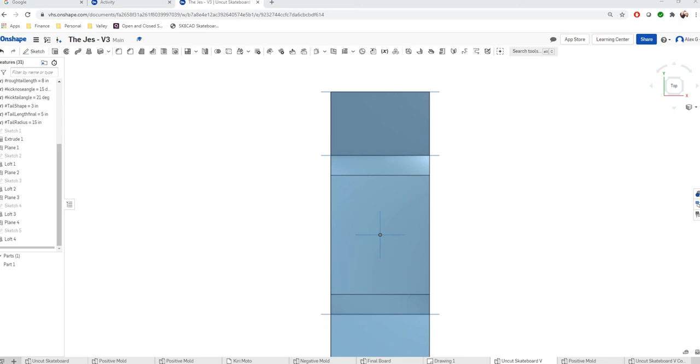Okay, we're back and we're going to do the first part of our final cut on the skateboard and our model here. And what we're going to do is we're going to create a work plane, and then we're going to use that work plane in a separate part to actually create the final sketch or the final cut of the skateboard, because we want to leave this model untouched.

We want to be able to use this when we actually use our assembly file and put our molds and skateboard together. So to do that, we've got to do a couple of steps here, and I'm going to walk you guys through how to do that in this video, while also keeping the idea that we want to keep a skateboard that's really parametric, able to change all of our models and cuts based on what the customer needs.

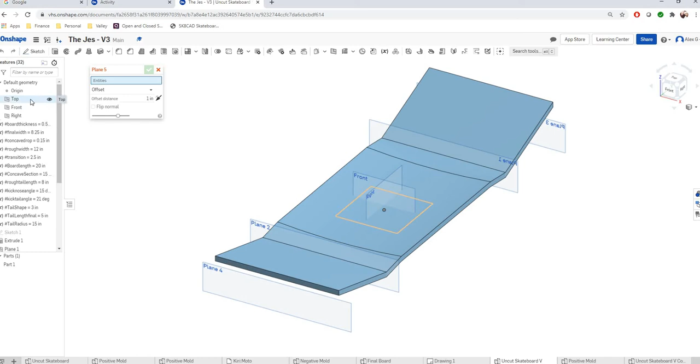Okay, so we're going to start off here with a work plane, and that work plane offset is going to go from the top of our geometry. Okay, so the top of our origin, and we're going to put it like 1 inch above our skateboard. The reason we're doing that, getting this distance from here to here, is so that as the angle of these kicks change, they won't interfere with the sketch that we're going to create up here.

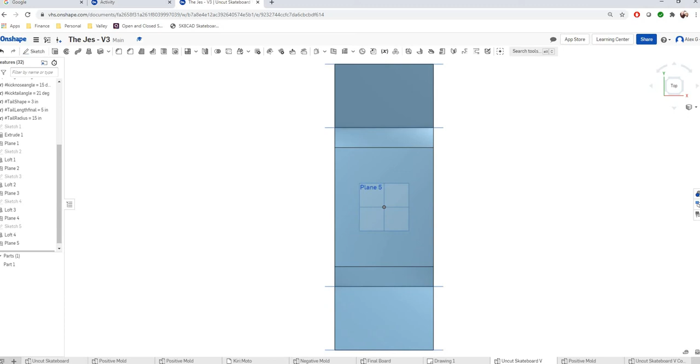And then we're going to start a sketch on that work plane, and we're going to just start off with a simple rectangle. You see how it wants to attach there? I don't want it to be attached. I don't want to be constrained by anything, so I'm just going to make sure nothing is yellow, and I'm going to put my rectangle in there.

All right, and then when we start putting constraints in, it will be the exact constraints that we want. We know we're not locked into anything that is going to surprise us later on.

Okay, so now we want it to be constrained to the middle of our board. And the only way to make sure that everybody is on the same page of this, if you didn't constrain your board to the origin, is by turning on the visibility of that center sketch. And we're going to copy that geometry. So we hit the visibility for our first sketch, and then use geometry, and we're going to click on that line there, make sure it's going all the way across.

And now we can put our dimension going down. Mine does happen to be with the origin, but if yours didn't, then if you just clicked on the origin, it wouldn't be in the right spot. And we're going to put 0. Okay, so now it's constrained to that 0, and we want this to be the correct distance going all the way out.

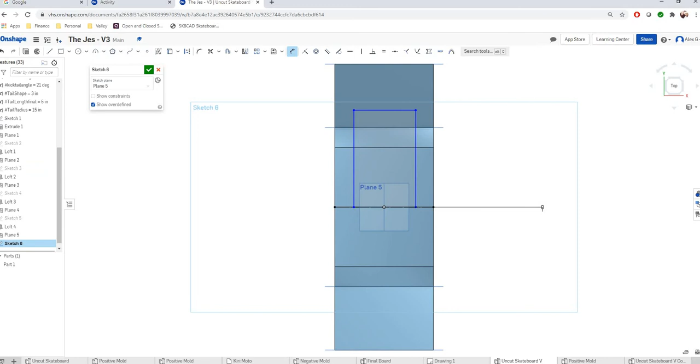So what we'll do is we're going to put in a measurement here, and we're going to put in a little evaluation. My mind just totally blanked on the correct terminology. But we're going to put in a little equation here, and that's going to give us the correct distance.

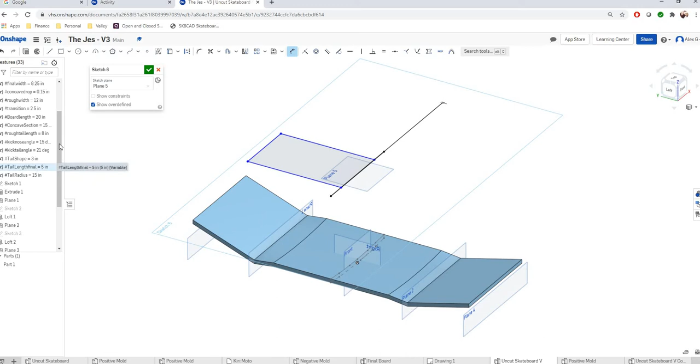But first, before we do that, we've got to make sure that we're working with the right end of the board. Okay, so let's figure out which end of the board we're working on. We're going to do that by changing the kick nose angle of one of them. We're going to make it perfectly flat, so we're going to say the angle is 0. Okay, let's see if it'll let us do that.

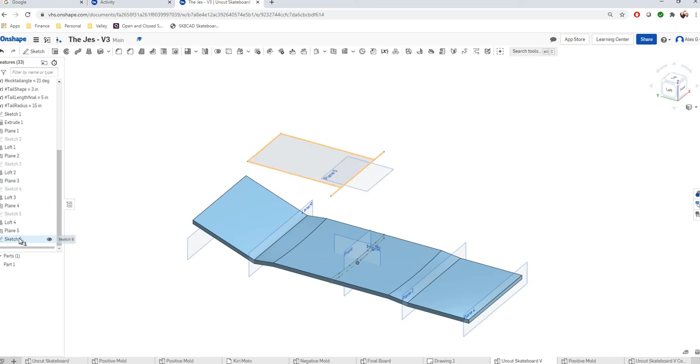Yep, okay, so this is the kick nose. See how it's 0 up here? So this is the nose. So we are working with the tail. So we need to make sure that when we're putting our dimension in this guy, that we reference the tail length.

The other thing we need to do is add in another variable called tail length final, and we're going to default that to 5 inches. You can change it later, 6 inches, whatever you want, but we're going to change that default to 5 inches, and make sure you add the variable above being 5 inches.

You've already added a ton of variables, so I don't want to spend time going over that, but you're going to put in tail length final, and then make sure you drag it up above here so that the sketch can actually use it.

The formula that we're going to use, I've recreated in a Word document so we can just copy and paste it. You can see on the screen here this is the formula we're going to be using. Onshape's syntax is pretty finicky, so I was playing around with it beforehand to make sure we had the right one.

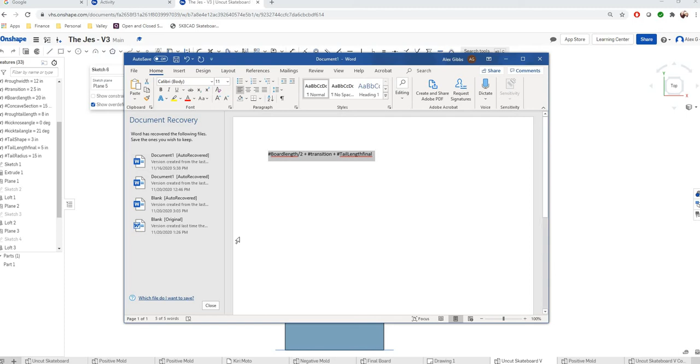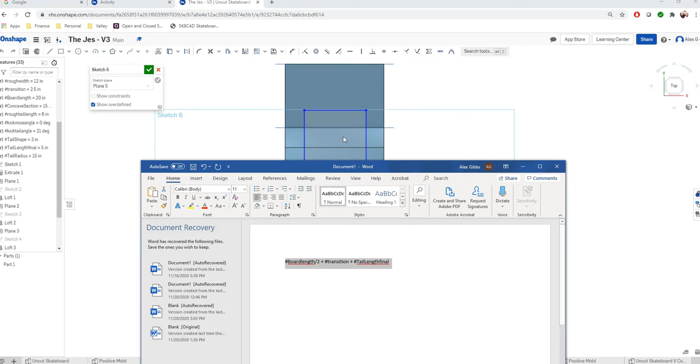The length we want is driven by the measurements we already have. We have the board length, which goes all the way across the board, so you have to divide that by 2. We have the transition that goes from here to here, and then the final tail length, which is what we're going to be putting in as a measurement itself, which we have set for 5 inches.

So we're going to put that dimension in, and we're just going to copy and paste that formula we created, this formula right here. You do the same thing for the other end, only you're just going to be using the nose length for the other end, and you'll have to create those variables. I'm not going to do both sides for you, you guys have to do both sides.

Now we put that in there, and it's going to reference all of our other things. So as we change this, let's say I change the tail length to 6 inches—okay, you can see it went a little too long there, so we'd have to change some other measurements. So I'm going to change it back to 5 inches.

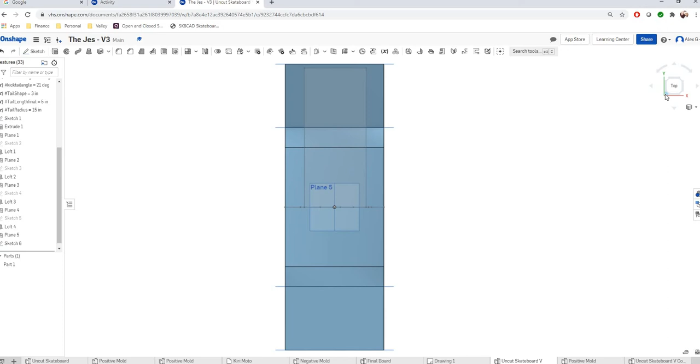Now we've got half of our board ready to go. All right, the next measurements we're going to use are ones we've already created.

This is the final width of the board. We already created this in a previous video, the final width, so that when we change this number, it's going to automatically adjust all the geometry we've already built into the board. So we can just reference that number going across here to here by saying hashtag final width. Now we've got that number called.

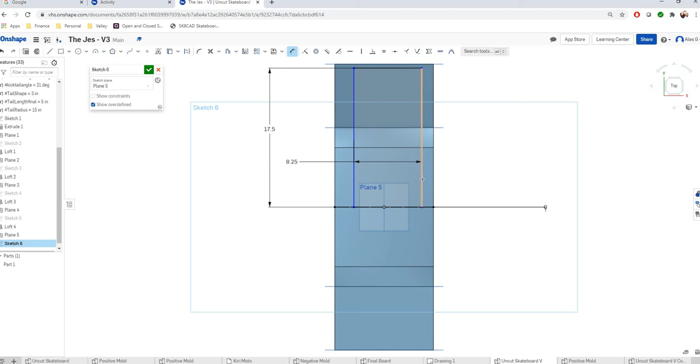It will change as we change the rest of the board. Now we want to make sure it's centered here, and the easiest way to do that is to actually reference the board width if it changed. So we have our rough width—we're going to say hashtag rough width, and we're going to subtract the final width.

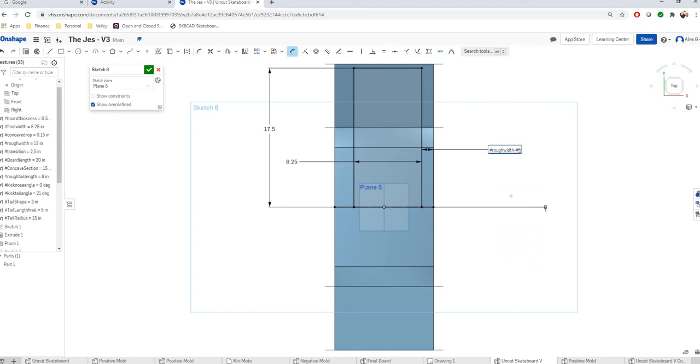You can see how it pushes it all the way to one side. That's because we didn't account for wanting it spaced on both sides, so we're just going to divide that number. We're going to put brackets around it—I think that works for the syntax here—and divide that by 2. Boom, there it is, yep.

Now this is centered. As we change the final width of the board, the rough width of the board, or any of the length, these numbers are all going to adjust automatically for us. So that's all good news for us at this point.

Now what we'll do is start putting in how we're going to adjust the shape of this board. We want to put in some curves on the top of the board here, and we're going to use 3-point arcs for that.

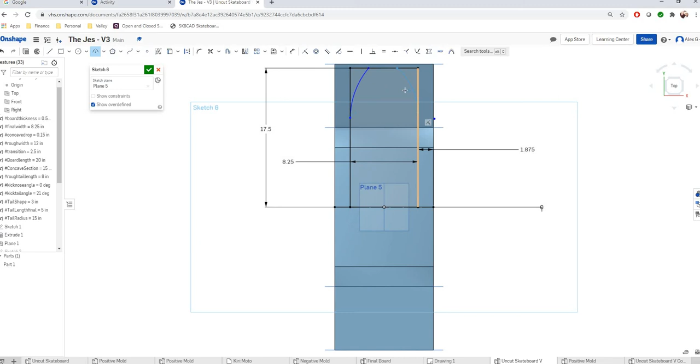Go, I'm going to have that arc going in there. There we go, okay.

I'm going to go ahead and close this sketch for a second, because we're going to need to add some variables now. The way we're going to add variables is we want to account for the length of this distance from here to here, and we want to account for the shape of the arc from here to here, and then we also want to account for the radius of that arc.

So the way we'll do that is you're going to create a couple of variables. The first variable, and again we're working with the tail here, is the tail shape. So you would click on your variable, hit tail shape, and we're going to make that one 3 inches.

And then we've already created the tail final length. So again, if you haven't already, you're going to create the variable for the final tail length. And then the last one you have not created, which is the tail radius - that radius is going to be how round this curve is, the roundness of this curve. So we've got all our variables created at that point. If you haven't yet, go ahead and pause the video and create them real quick, because you can't do the next parts without these 3 variables.

Okay, so now we're going to go back down to our sketch, and we're going to put in our dimensions. So from here down to this is going to be our tail length final. And we're going to put that same one in here.

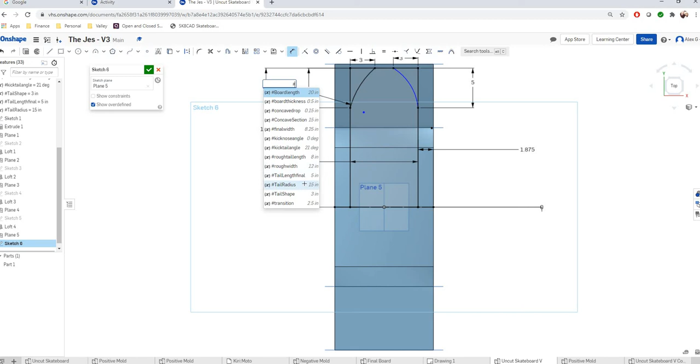And then our last is going to be that radius. So we're going to put our radius in here, and we're going to say we want that tail radius to be 15. And then we'll change that other one as well.

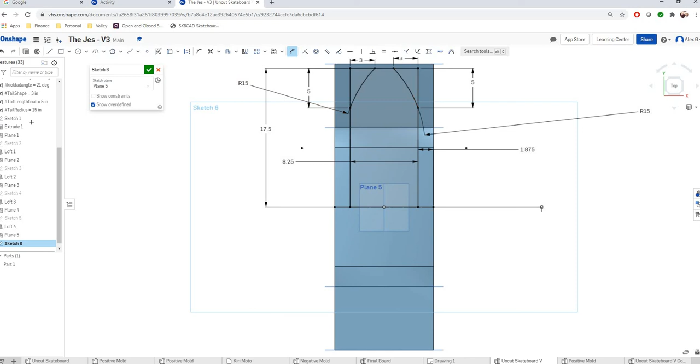So this board looks like that's a pretty sharp curve going in there. So maybe we want to change that tail radius so that our foot has a nice wide area to go to, and maybe we want to change that tail radius to something a little bit smaller. Okay, so we can say let's go 8 inches, and let's see if that gives us a little bit better shape. Yeah, that looks a little more rounded in there.

Okay, so that's the first part of our video. You guys are going to do the same thing going the other way though. So you've got to create the nose using similar variables - you're going to have to add the nose shape, the nose length final, the nose radius, and you're going to do the same thing going the other direction as you did with this end, only you're going to be referencing the new variables that you guys are going to put in there.

So you're practicing it on this end with me in the video, and then you're going to put that to work on the other side of that board, and then we'll come back and show you guys how to create that extrusion and the assembly file in another video.